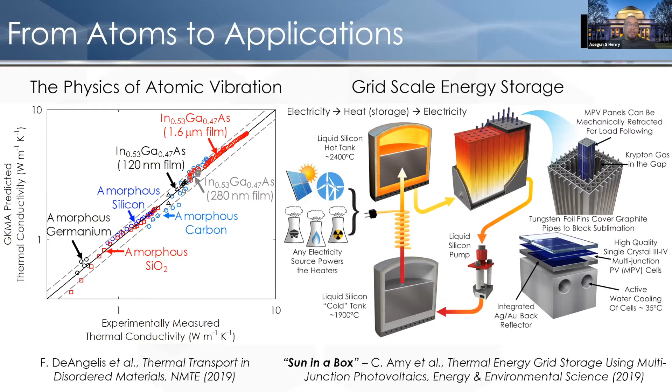And if there's time, I'll also try to go through a couple slides talking about some of the most important problems that I see as our path to being able to continue to exist on this planet and not die from climate change. I'll point out 5 in particular grand challenge problems that my hope is that the next generation, many of you that are on this call, will take up an interest in and find solutions. These are giant problems, major problems that, if solved, will likely be the linchpin to helping us survive climate change.

So let me start with this first problem. I'll spend, like I said, the majority of the time talking about this grid storage problem. So climate change, as far as I'm concerned, is the most important problem in the history of mankind, in the sense that it's the most clear and imminent threat to our species' survival. The other thing about this is, we know what it will take to solve it. We're clear on what has to happen. And one of the most important things that has to happen is we have to decarbonize the electricity grid.

So the electricity grid comprises about 25% of the problem. It's where a bunch of CO2 emissions come from. We make electricity by burning fossil fuels, which then drive heat engines, and they make power. And ultimately, what we need to do is a complete overhaul of the entire power infrastructure. So we need to not use any fossil fuels and replace all of that with renewables.

The problem is that with renewables, like solar panels and wind, you only get the electricity when the sun is out or when the wind is blowing. So the way the physics works is there's no real storage of that energy, and you just get it whenever the weather is permitting. Now, the problem is the way the grid works is, when you turn your light switch on, you expect that power will be available.

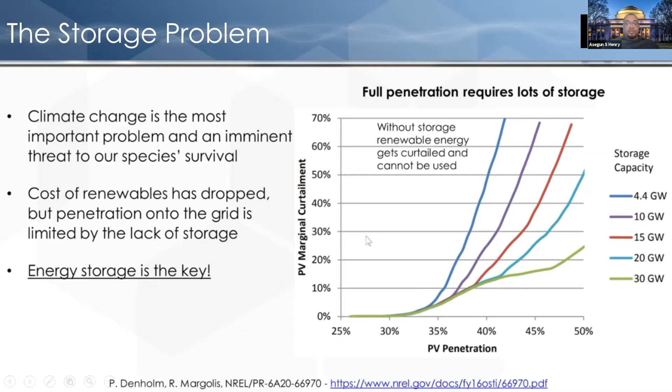And the main issue, the reason it's not a straightforward solution, is the first thing you would think is, well, let me use maybe lithium-ion batteries or the same batteries they put in Teslas. And the problem is that those batteries are too expensive. They cost too much. If you do solar plus batteries, the batteries cost more than the solar does. And so those batteries are not really well suited for this problem of storing energy at extremely large scales.

So what we're proposing and working on developing are what are called thermal batteries. And a thermal battery basically takes in electricity, converts it to heat, my specialty. We store it as heat and then convert it back to electricity whenever people want it. And so it works like a battery, but it's actually really a system of components. It's got two converters: a converter for converting electricity to heat and a different converter for converting heat back to electricity.

Now, when you get older and you take a thermodynamics class, you'll ask this question: why would anyone ever do this? Because this would sound totally stupid if you've taken a thermodynamics class. And the reason it would sound stupid is because we expend great effort to convert heat to electricity the first time. So when we have those heat engines and those turbines that are turning in order to convert heat to electricity, we end up losing the majority of the energy. So the majority of the energy actually gets wasted as waste heat.

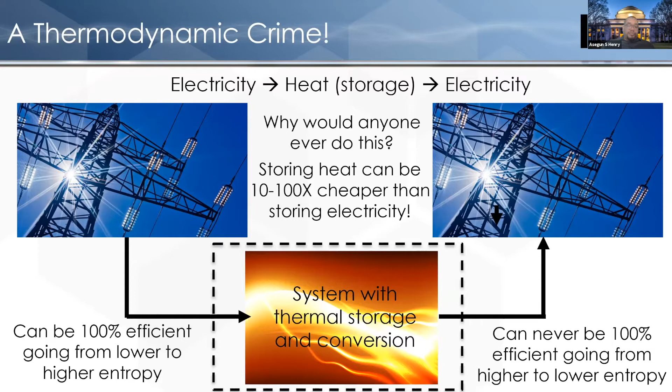So even though you end up throwing away the majority of the energy, storing energy as heat is about 10 to 100 times cheaper than electricity. So even if you take a hit of, let's say, a factor of 2, so it's like half as efficient, it pales in comparison to getting a cost that's 100 times lower. Okay, so that 100 times factor is much more important than the factor of 2 that you pay. So that's the essence of what we're doing.

This is generally how it works. The way it works is we take in electricity from renewables, so solar and wind. And what we do with that electricity is we run resistive heaters.

So these are, for all intents and purposes, giant incandescent light bulb filaments that are very, very hot, so hot they're glowing white hot, just like a light bulb. What we then do is we pump liquid metal through some pipes past those heaters, and the heaters are converting the electricity to heat. So that's the first conversion. And then the liquid metal is carrying that heat over to this storage unit.

And this storage unit is basically a giant bank. Imagine it the size of like half of a football field. It's huge. And it's about 10 meters tall, so it's about 30 feet tall or so. And inside of it are a bunch of giant graphite blocks. So graphite, you can kind of think of it like pencil lead. It's basically carbon. And it happens to be very refractory.

It actually does not melt or decompose until extremely high temperatures. But it's very cheap. It's very abundant. Carbon is basically one of the most important elements we're made out of. There's a whole lot of it on Earth. And so therefore we can make this very inexpensively. And we heat up these blocks till they're glowing white hot. And so that's how we charge up the battery: we take electricity in, we run that heat and move it over to the blocks. And then we have those blocks get heated up to the peak temperature, which is about 2,400 degrees Celsius.

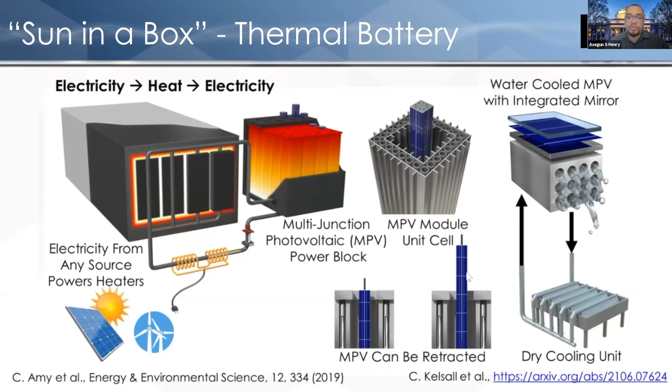There are a number of reasons why we do this; I'll go over them later in the question and answer period. But that's the basic idea: we can have a very fast response to the grid by inserting those PV cells, and we can move them up and down to change how much light they're exposed to, and so we can change dynamically. So this is our main technology called thermal batteries, or sun in a box. The main thing that's compelling about it is the cost. So the cost is extremely low.

So the cost of lithium ion batteries right now is about $150 per kilowatt hour. A kilowatt hour is a measure of energy; you can convert it to joules. And you pay about $150 for every kilowatt hour of energy you could store. And what we have estimated for our technology is that it gets down below $10. So it's more than 10 times cheaper than batteries are today. It's actually cheaper than any other technology we're aware of. And so for this reason, we're very excited to try and build it and test it out and hopefully get it commercialized so that it's a commercial product you can buy.

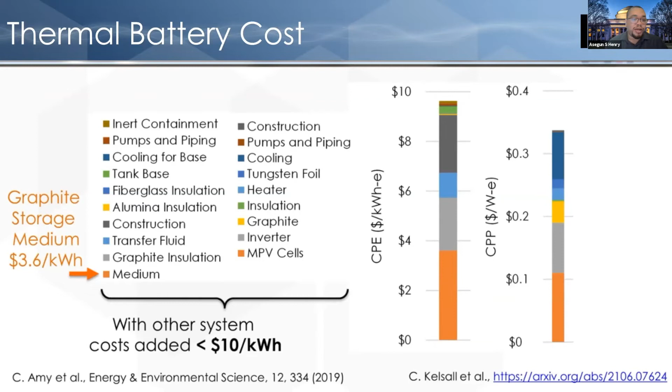And so one of the key questions that people usually ask, and you probably should ask, is I mentioned pumping liquid metal, and I mentioned temperatures that may sound ridiculously high, over 2,000 degrees Celsius. And that would sound crazy because prior to us doing some work in 2016, there was no pump that could do something like that. And the reason there's no pump is because pumps generally require seals, and the seals are typically made out of polymers. Polymers are a class of materials kind of like plastic. So plastic is a polymer. And plastics decompose. The way the molecules are bonded, they are not strong enough to hold themselves together at extremely high temperatures, so they decompose, they'll vaporize, literally turn into gas.

And so nobody could make a pump that could go this hot because you don't have any seal. You don't have a way to seal it. And so that was our major step forward in terms of a technological contribution and breakthrough here, is we figured out a different kind of seal. And so we figured out a seal that we can make out of carbon that actually can work as hot as carbon can work. So we can go up to 2000 C or above.

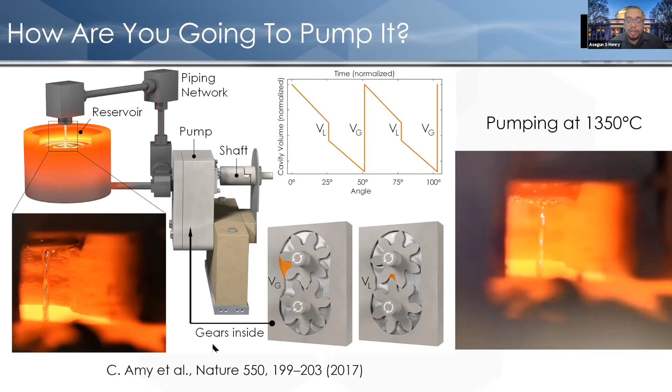And so we've now done tests where you can't see it, and we measure it a different way, and we've demonstrated above 2000 C pumping. And so this is the main technological contribution we've made. Another more recent technological contribution, just to give you a sense of where we are with this technology and where we're headed, is on those photovoltaic cells. Those are not normal photovoltaic cells. They are a class of photovoltaics called thermophotovoltaics, because you're converting it from a heat source.

And the previous record for thermophotovoltaics back in 1980 was 29%. And so over the course of 40 years, just last year, someone set a new world record at 32%, only went up by a few percent. But now, just in our lab, we just measured 42%. So we actually pushed it up 10 points. And so we're very excited about this. This is well on our way to our goal.

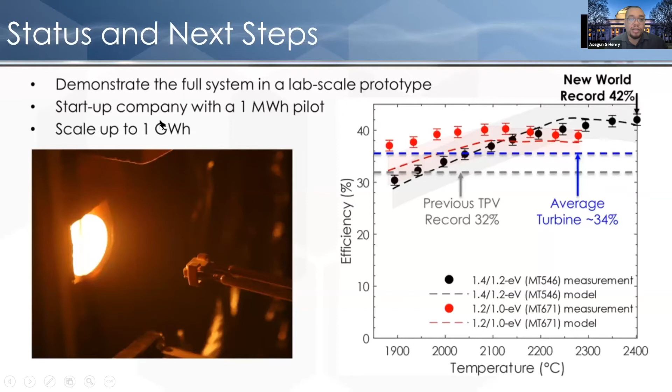Our goal is 50%. And so if we can get to 50%, then our battery will basically be 50% efficient. And that's actually about as good as I think we can expect. So we're getting closer to our goal. What we're planning to do next with this is build a full system prototype in my lab, and then hoping to start a company and build a 1 megawatt hour pilot, and then eventually scale it up to the gigawatt hour scale.

Real briefly, I'll just touch on some other things. It looks like we got about another 5 minutes or so.

So once we figured out how to pump liquid metal at extremely high temperatures, it really opened the floodgates to all kinds of new ideas and new concepts, because it was really something that was impossible previously. And one of the other ideas that we're working on is another climate change related problem, which is the way we make hydrogen. So many people may have heard of the hydrogen economy. Even in the absence of the hydrogen economy, you need hydrogen.

You need hydrogen because we use hydrogen to make ammonia, and you need ammonia to make fertilizer so you can grow crops and feed 7.5 billion people on Earth. So hydrogen plays a very integral role in the way that we live today. And the way we make hydrogen today predominantly comes from methane, from natural gas. So we actually take natural gas and we react it with water.

And what that does is cause the carbon to bond with the oxygen in water, and the hydrogen from the water gets liberated. So you get that hydrogen. You also get the hydrogen that was on the methane. Methane is CH4, it's this molecule here. So you get 2 hydrogens off of the carbon, then you get another 2 hydrogens from the water. That process is called steam methane reforming. It's very well established. The problem is it makes CO2. So the only way we know how to get hydrogen efficiently and cost effectively is to make CO2.

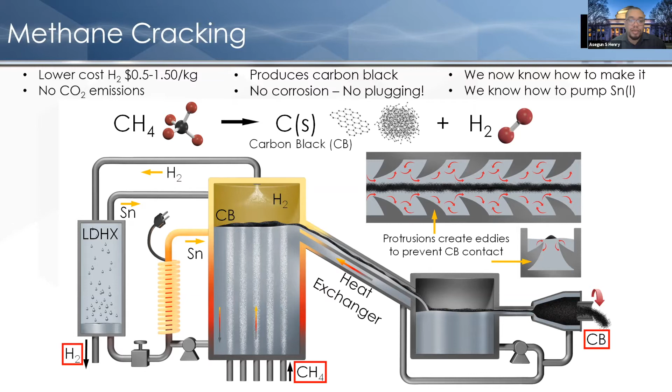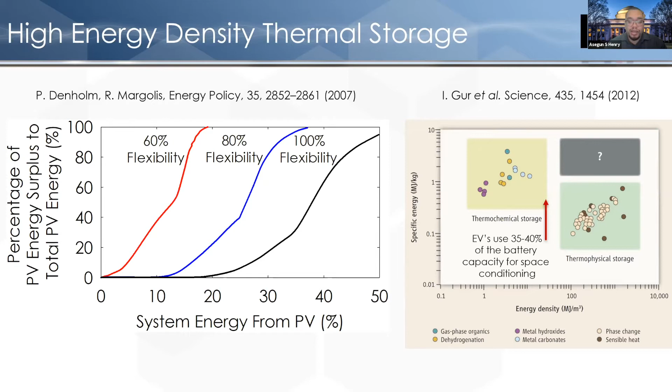So with that, I got about a minute left. I'm just going to quickly mention there are 5 major problems. We have a paper in Nature Energy that describes this a bit more. These are 5 thermal energy related problems that are key to mitigating climate change. The first is energy storage. We talked about that. I spent a lot of time talking about energy storage and the grid storage problem.

The second one, though, that is often not really appreciated, has to do with cooling. So the way we make air conditioners and refrigerators today involves chemicals that eventually end up getting out into the atmosphere. And when they do, they have a very strong forcing for the climate. And so they are actually thousands of times more problematic than CO2 is. And so even though it's a small amount of the material that's getting out from all the air conditioners and refrigerators around the world, it's actually going to become one of the predominant sources of climate forcing if we don't reinvent how we do cooling.

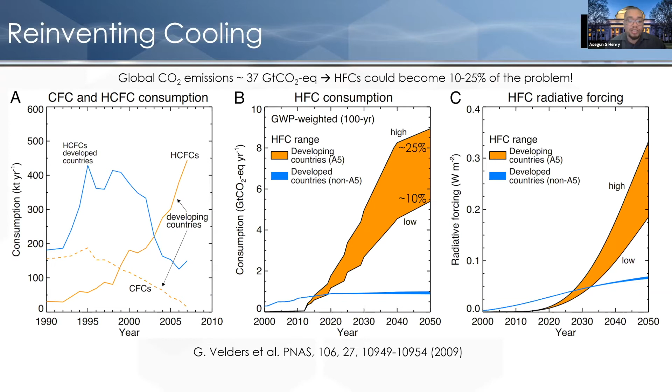So the way we do cooling is using a process called vapor compression. It's been around for about 100 years, hasn't changed because it works well. The problem is only this issue of these HFCs, or hydrofluorocarbons. It's the actual refrigerant that's used. And so we have to reinvent cooling. We have to figure out a new way to make things cold that doesn't involve these molecules or in some way is able to protect them and not actually have them get into the atmosphere. So this is a grand challenge. We don't have any great ideas just yet, but I think many people are trying to come up with things.

Another key piece is the industrial sector. So I talked about electricity. We are hopefully likely to switch to electric cars that will then be charged by a decarbonized grid. That's one of the biggest problems that we have. But another big problem is industry. It's almost similar in size to the problem of driving cars. And this problem boils down to a couple major industries: cement, steel, aluminum, and hydrogen.

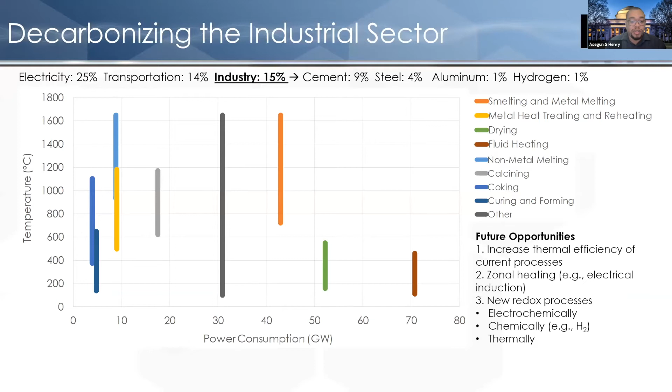So we're working on the hydrogen problem, but the cement problem is huge. So the way we make buildings makes CO2, and the way we make steel makes CO2. And these are some of the biggest industries on the planet. And we are trying to figure out new ways of doing those things, but we need help. We need a lot of help because there's no solution yet.

Another potential problem to be aware of is a big sink where we use most of our energy, which is actually in heating and cooling. So we take electricity, which is very high value energy, and then we usually downgrade it to provide space heating and cooling at temperatures really close to what human beings are comfortable with. And so there are a number of ideas for how to just reduce how much energy we use in heating and cooling. And one idea is, instead of heating up an entire building where you heat up all the air in the building, why not treat it like a local phenomenon like we do with lighting?

You don't put light everywhere, you put light just where you need it, where you're actually sitting. And so why not actually locally do heating and cooling? Because you're only trying to cool the person. You don't really care so much about the temperature of everything else in the room. And so this is a kind of conceptual shift, but it's important to think about new inventions and new ways of actually achieving things like this.

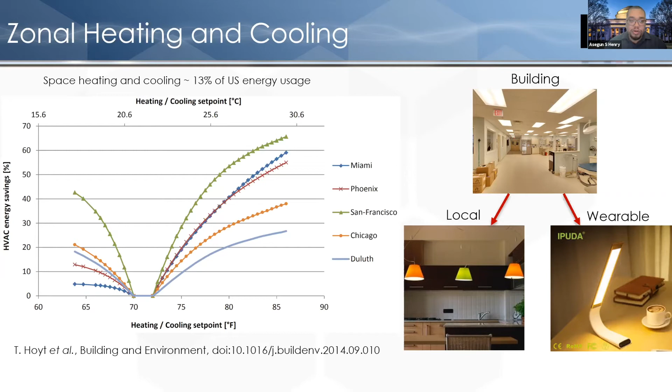Maybe you could make it where your clothes are actually doing your space conditioning and it just cools you, the person, rather than all the air around you. So these are important concepts to pursue. The last one I'll mention is long distance transmission of heat. So, we have power lines and those power lines move electricity. They don't move heat. And it's because heat is very difficult to move.

But if we could move heat, if someone could invent something so that we can move heat, we have an overabundance of waste heat. I mentioned this when I talked about power plants and how we lose most of the heat. But then we also want to do space heating at our houses and in our buildings. And we have plenty of heat at almost the perfect temperature that we want to use it. We just can't connect the dots. We can't take this heat from these power plants and run it over to people's houses.

So if someone could figure out a way to actually transmit the heat, move it over miles and miles from the power plants into people's homes, we could just use the waste heat as actual heating for people's homes. And so this is another gaping hole, another very important problem to try and solve if we can.